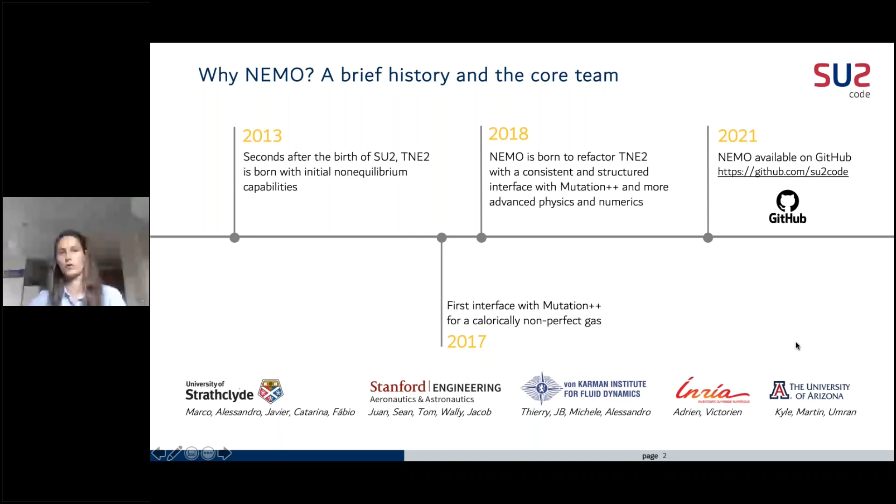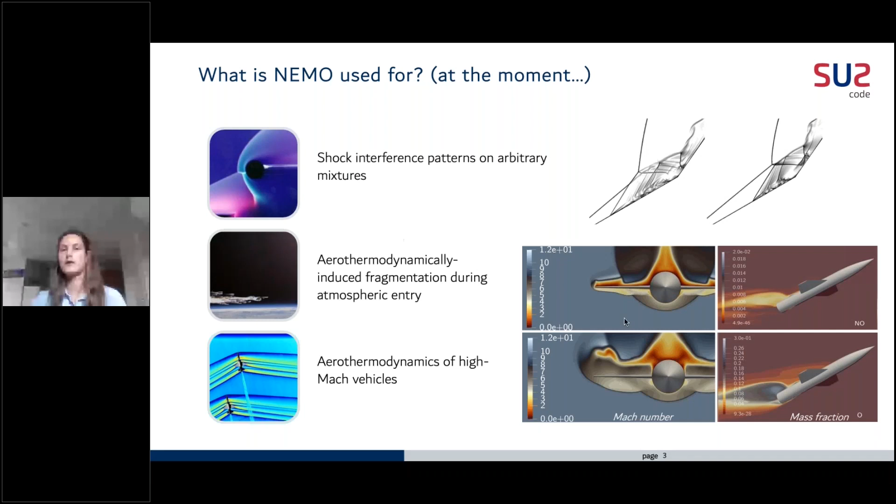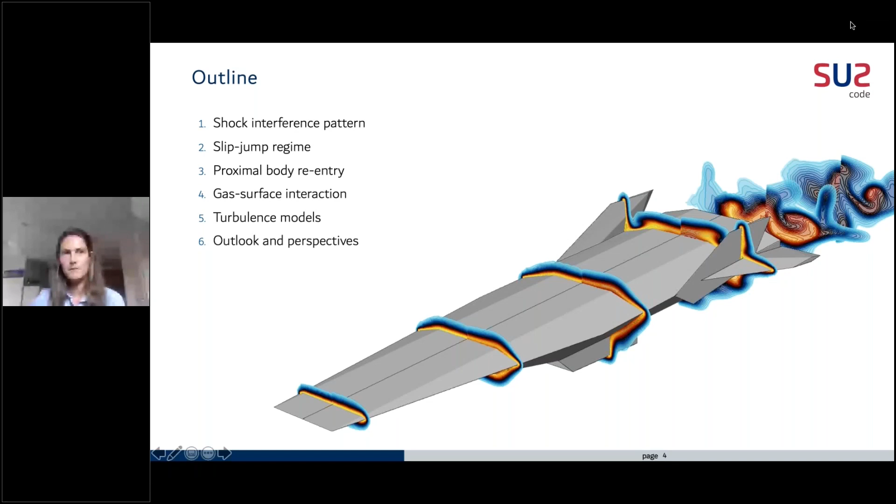Yeah, sorry to interrupt you. The video and audio is a little choppy. I would recommend maybe just turn off your video and just go with audio. Okay, let's try. Thank you. Okay, let me know if there's any other issue.

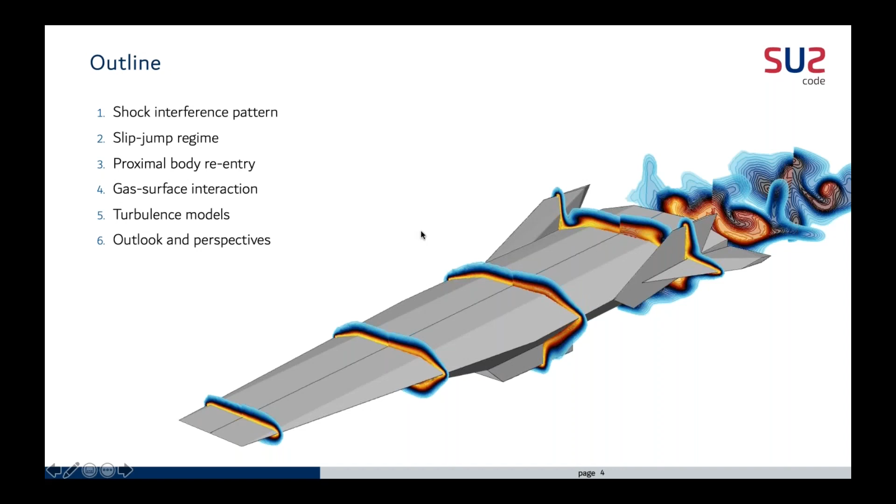Okay, so this is the outline that we will follow during this presentation. We're going through the different topics of research that we're currently focusing on with SU2-NEMO, and we will conclude with outlook and perspective for future work.

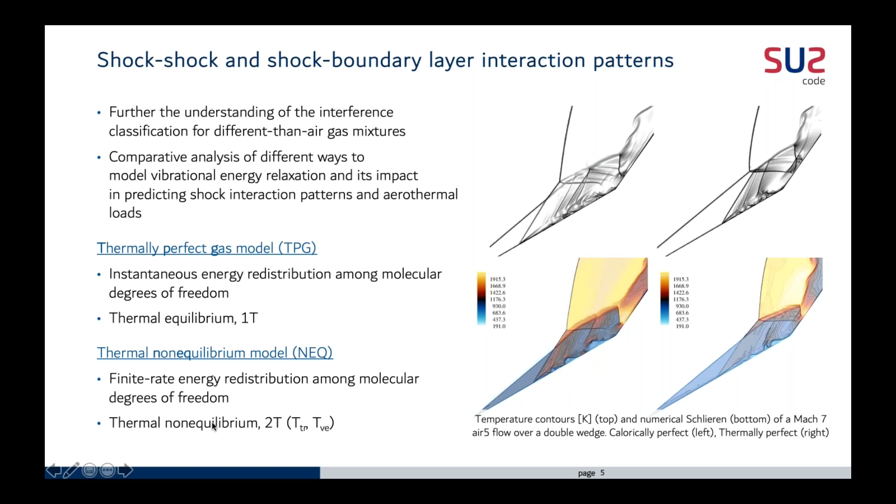So what's happening is that in the non-equilibrium model, because the internal energy across this first shock wave goes completely to the translational degree of freedom before being distributed, this means we need a stronger shock to decelerate the flow to deflect the same angle as in the thermally perfect gas model, because in that model a portion of the energy goes towards vibrational excitation instantaneously. So we can have slower flow after this first oblique shock.

We also have a thicker boundary layer here that separates and creates a larger separation bubble. Here we also have a separation bubble, but it's very small, almost cannot be visualized in contours. So here we will have a detachment shock associated with the separation, whereas here, because of the larger size, we also have a reattachment shock, and this is basically the main difference between the two mechanisms.

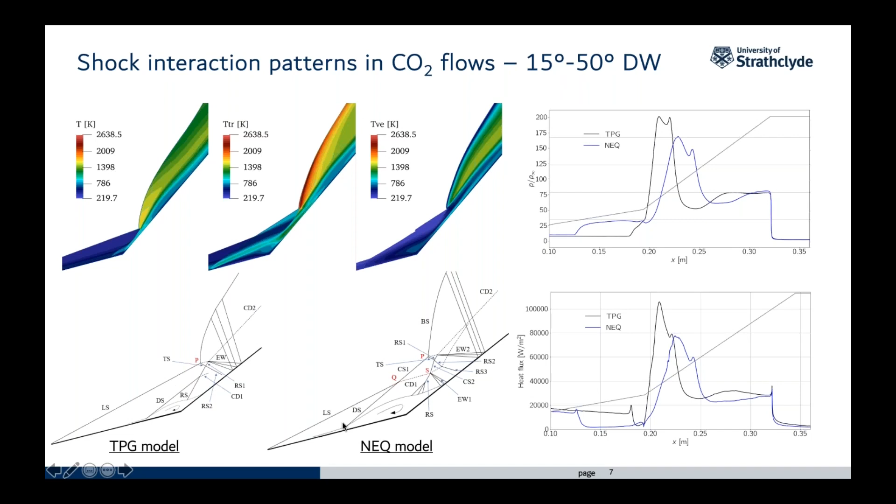And we can basically notice that for the thermally perfect gas model, these peaks tend to be larger and occur at an earlier location than for the non-equilibrium model.

Now, on the topic more related to the study of fragmentation during reentry, in SU2-NEMO we wanted to be able to simulate not only the continuum regime, but also more rarefied flows. Basically, in the transition between slip and continuum regime, the velocity and temperature of the gas are not equal to the velocity and temperature of the wall, because there are not sufficient particle collisions in this region, which invalidates the commonly used no-slip approach. So we could properly simulate the transitional regime and solve the Navier-Stokes equations accounting for this.

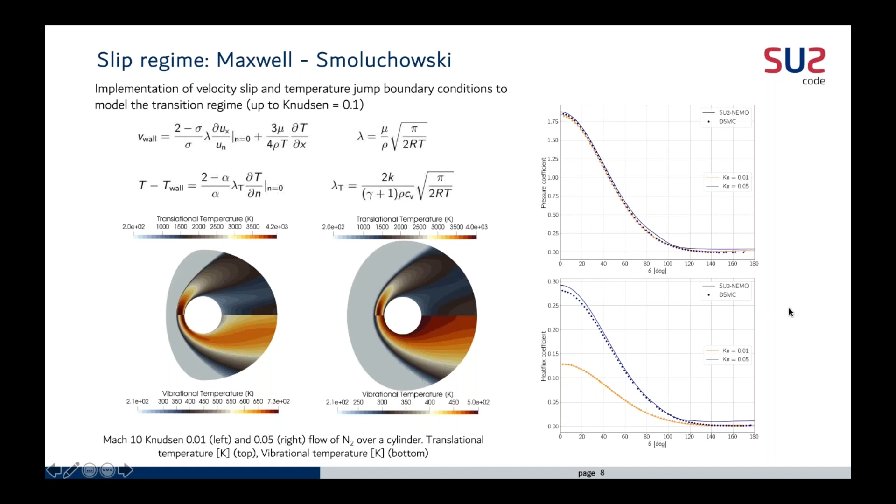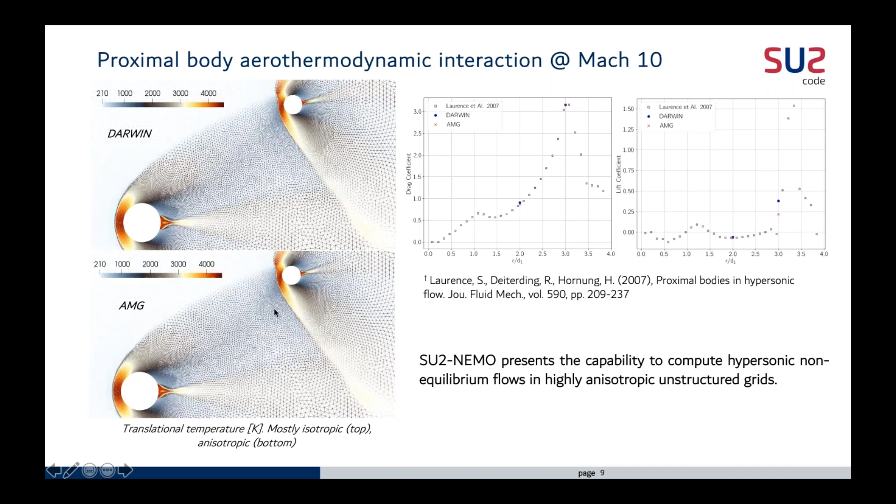So if we go to the next slide and zoom in on the interaction region, we can see, comparing the different adaptation processes, that AMG actually provides a much better capture, especially when it comes to this discontinuity that we see in the last mesh here, and in the contours it's the contact discontinuity.

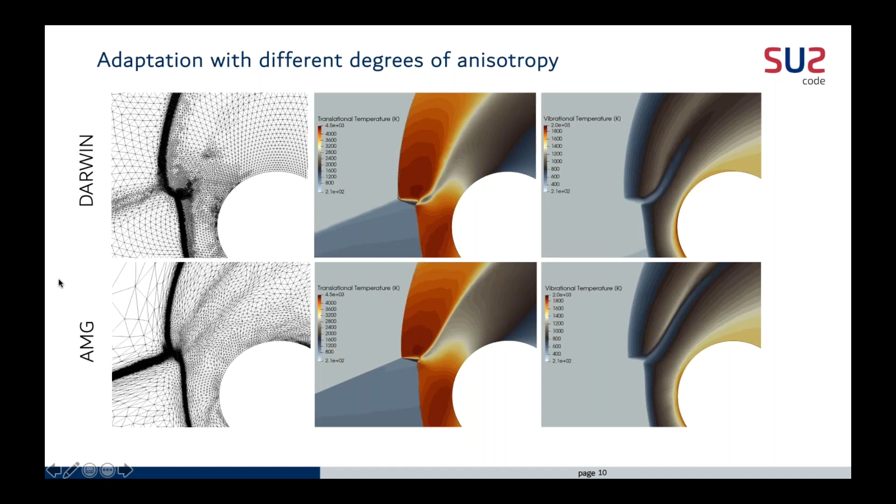So having assessed the capability of SU2-NEMO to properly use anisotropic meshes for two-dimensional cases, we then went to the case of three dimensions. So we simulated proximal spheres.

Once again, these results highlight the importance of using an adapted grid that follows well the directional features. So if we compare Darwin to AMG, we see not only that the shocks are much finer, but if we zoom in on the interaction area, we can also see that the impingement of this jet is also very well captured, which at the end of the day is the most important thing for vehicle design.

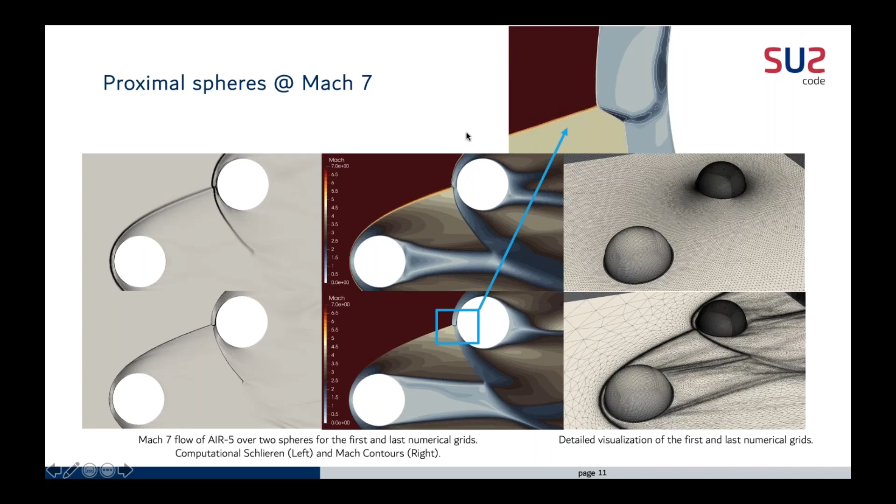So now I'm going to pass the word to my colleague, Walter Maier. Hi everyone, I hope everyone is doing well. So to continue on with what Catarina has mentioned, we'll present some more test cases here that we've run recently.

With SU2-NEMO, some of the hardest things to do are predicting surface properties like heat flux and accurately computing flow enthalpy. So this case here represents an arc jet, which is essentially a way to test high enthalpy flows by rotating an electric arc in our plenum and going through a converging diverging nozzle. This allows us to capture high enthalpy flows. So with this case, we're simulating a flow that has 15.2 megajoules per kilogram of enthalpy, and it's really difficult to capture the enthalpy, particularly along the center line.

One of the developments directly used in this case is the use of the axisymmetric source terms that one of our colleagues had just implemented. In this case, what we really want to notice is the temperature plots. In the plenum and the converging part of the nozzle, we see pretty good equilibrium with the temperatures. However, once we reach the diverging nozzle, we start to see a large discrepancy, a large state of thermal non-equilibrium.

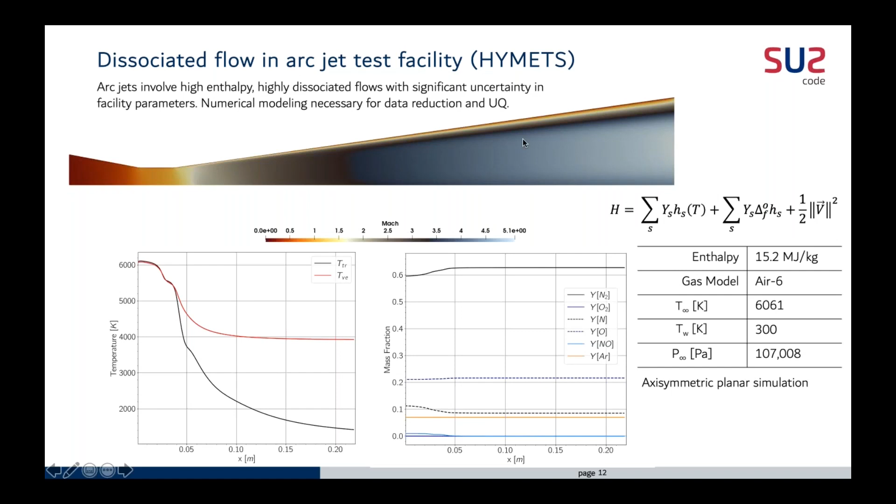I'll go to the next slide. Oh, there we go.

Another case that we're really looking into is gas surface interactions. As mentioned before, predicting heat flux in these regimes is extremely difficult. You can use your standard isothermal or heat flux wall. However, once we start reaching these temperatures and levels of enthalpy, they're no longer valid due to the fact that we have species recombination at the wall boundaries, particularly the monatomic species like monatomic oxygen and nitrogen will recombine into N2 and O2. So work is being done right now to model these catalytic wall boundary effects.

We have some of the equations listed here. In doing this, some of the things we're looking into are supercatalytic walls, which is essentially saying all nitrogen and all oxygen are recombined at the wall, so there's no more single monatomic species at the wall. We also have partially catalytic walls, where we specify this gamma value here, so we get a more realistic type of recombination. We're still going to have nitrogen and oxygen at the wall, however, it's not going to be a simplifying assumption where it's either none or all.

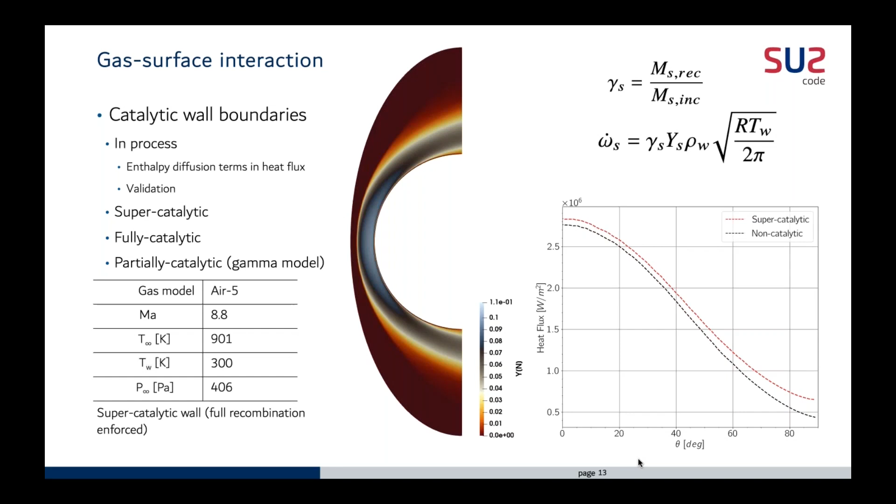And then another area of work is hypersonic turbulence. As of right now, the SA model plus all its versions have been added into or coupled with the SU2-NEMO solver, and there's not much difference between the SA model presented with NEMO versus the regular SU2 solver. The big differences lie within the variable structures within SU2-NEMO. With SU2-NEMO, we are carrying multiple densities and multiple temperatures, which doesn't really line up with the SA model that the baseline SU2 uses.

So as for now, we've mirrored those functions over and played around with the indexing information. One of the important things is the SA model is designed for a single density, so to get around that, for right now, we take density as the sum of all the densities in the flow.

We're working through implementing the SST model, as well as looking into some more hypersonic specific models to better understand what's happening there, with the end goal being modeling transition in hypersonics, which is always fun to do.

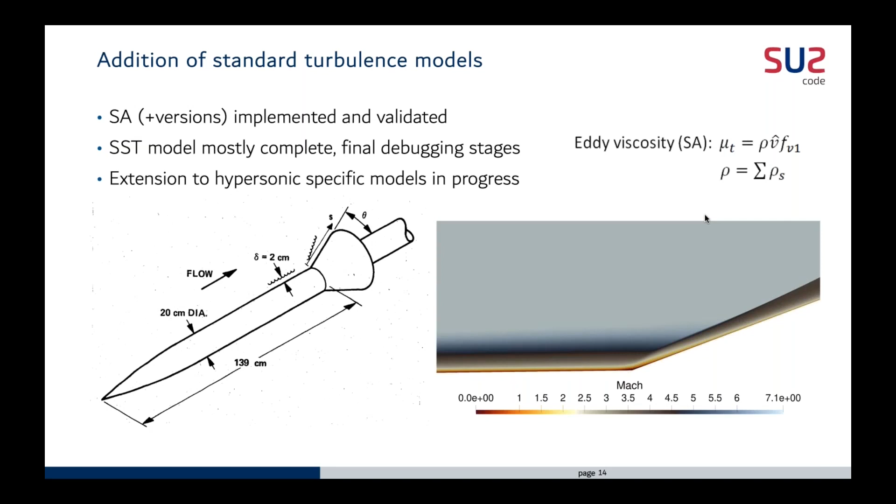This case presented here is the NASA TMR axisymmetric shock wave boundary layer interaction, more funnily known as ASWIBLY. This is one of the cases we ran for a recent publication where we were looking into the shock boundary layer interaction, similar to what Catarina had shown above, maybe less drastic with the interactions.

Here are some of the results coming out of SU2-NEMO. We're predicting the boundary layer fairly well, and we're capturing surface pressures very well.

One of the things active work we're looking into is the heat flux calculation, which we see here, where SU2-NEMO is predicting a higher peak heat flux, which is also a little closer to the compression corner. This may be due to we've added some extra physics but aren't capturing some other parts of the physics, possibly with Prandtl - a constant Prandtl turbulent number may not be the most appropriate, but these are some of the things we're doing and working through with SU2-NEMO.

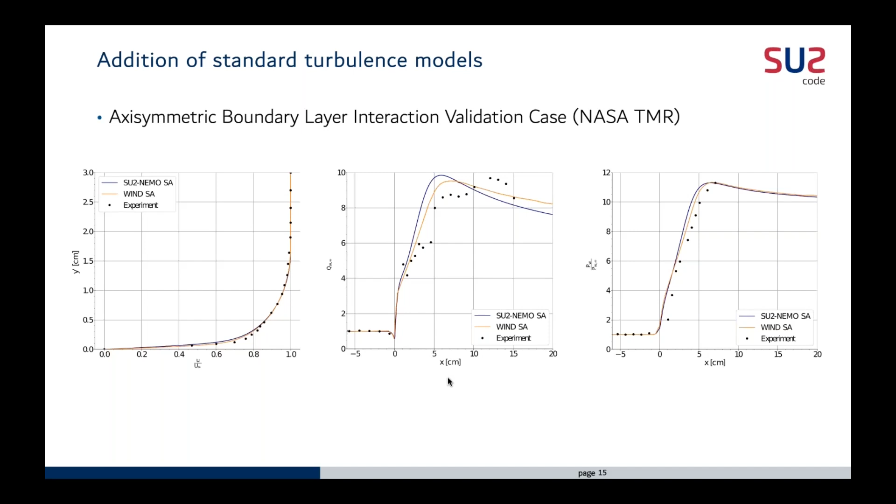And in terms of the SST model, we expect to get better results by more accurately predicting the separation region at the compression corner.

With that, that concludes some of the developments that have been made in the SU2-NEMO solver in the past year. We're continuing to build and improve on the code framework, but here are some of the more detailed outlooks and future work that is either ongoing or very near in the works.

Some of that includes looking into uncertainty quantification, particularly with the thermochemical models we use, robustness and accuracy on anisotropic grids, gas-solid and gas-surface interactions with the catalytic wall boundary conditions.

A big one that I know is going to cause a lot of headache for some of our future pull requests is code robustness and speed up. It's always a challenge, and we look forward to updating NEMO.

Looking into reintroducing the discrete adjoint, reduced order modeling capabilities, re-entry, magnetohydrodynamics, and most recently, looking into large eddy simulations for SU2-NEMO.

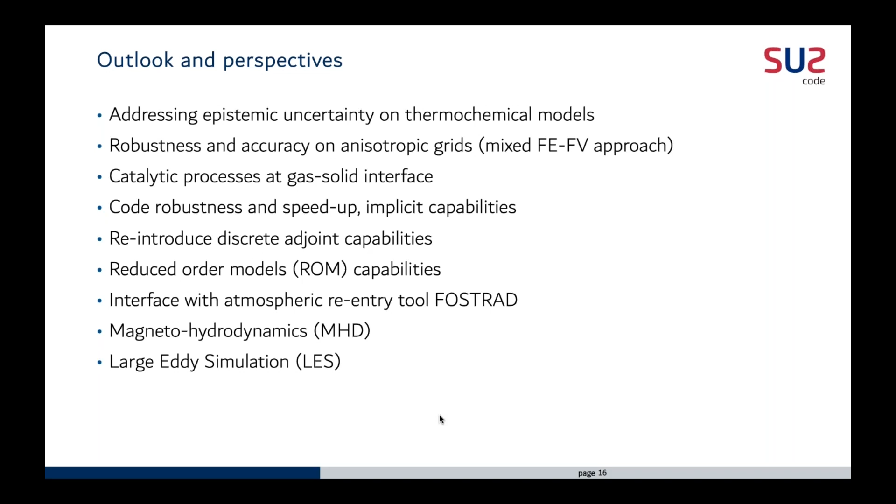With that, here are some of the recent papers published, so if there's any information more that we can't go over, we invite you to read some of these, but if not, we are happy to take any questions. Thank you very much.

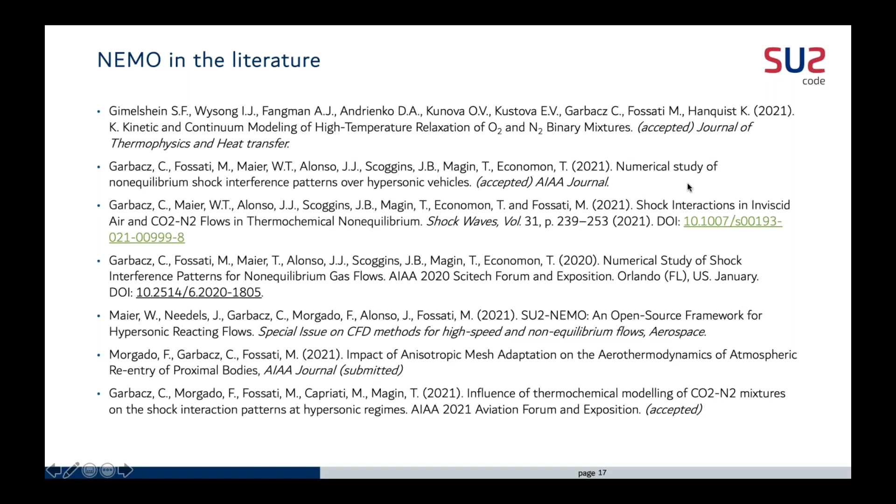I'm curious what exactly you're going to do related to robustness and code speed up.

That's a great question. Not to throw other people under the bus, but someone who's been very helpful in helping us work through that is Pedro - so thank you, Pedro. I think a lot of it is going to be taking a deep look into some of how we do our math, particularly when we equilibrate the temperatures and solve for the temperatures. That ends up being a large amount of time. I believe we use a bisection search at the moment, which really eats up a lot of time and gets a little tricky. So maybe going to a Newton solver, something like that.